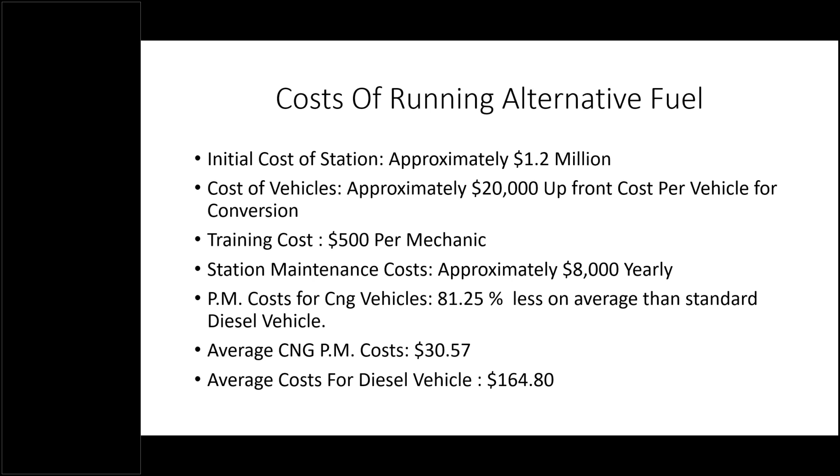The PM cost for our vehicles has dropped. It's about 81.25% less than a standard vehicle. For me to have one of my techs service one of our CNG vehicles, it's about $30—that's the oil change, the filters, going through everything, and time of labor—when it was averaging about $164.80 for me to do the same PM on one of our diesel vehicles. So the maintenance cost has come down, the fuel cost has come down. We have our own stations here at Tamarac, so the convenience is there. Our operators like the CNG vehicles—how they ride, how they drive—everything a lot better than the diesels. So it's a win-win-win-win situation.

So, at City Furniture, we're quite happy with our alternative fuel vehicles. We love the conversion over to CNG and alternative fuel so much that we've dedicated it in our 2040 carbon neutral pledge, which is one of our pledges for City Furniture Corporate, that we are determined never to go back to anything—we're never going to use or buy anything but an alternative fuel vehicle. We're reaching out into the electric field, but we know right now that's not ready for our application—it's going to be a few years before that. But we're reaching out, trying to find any new alternative fuel system vehicles that we can buy.

There's a lot of benefits to alternative fuel. We get our yearly grants through the state of Florida, and we work on that. We have a committee that makes sure we keep updated on all grants for the vehicles themselves, and all the grants for building our stations.

Right now we're building another DC in Miami Gardens, Florida. We're starting with TrueStar, and they break ground next month on that CNG station. We've opened a new DC in Ocoee, Florida. They broke ground last week on that station, and starting in July we'll be open. By January, we'll break ground for the CNG station in Tampa, or Plant City, Florida, on our new 1,300,000 square foot DC in that area.

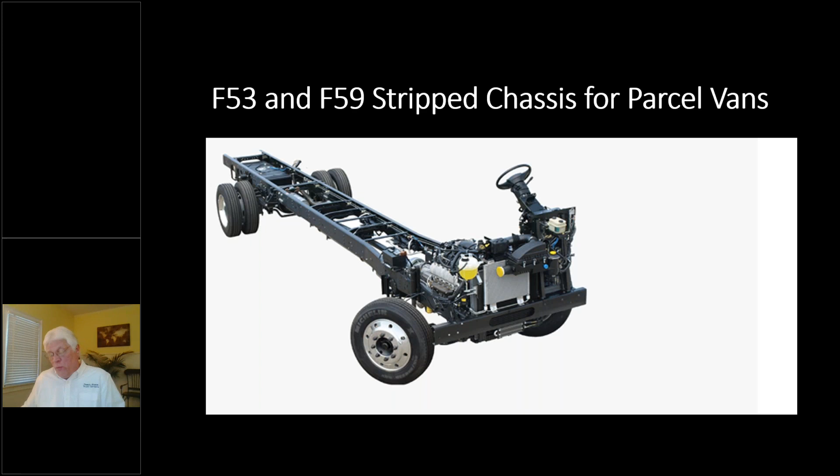Also very popular for CNG is what we call the strip chassis for parcel vans. So the vans you see in your neighborhood commonly with companies like UPS and Amazon delivering parcels, we can sell them the chassis and then upfit it with a body and they run it on CNG. It's a great application.

We're going to shift gears now and look at some of the offerings that come from Freightliner. Freightliner in the Class 7, Class 8 market is the number one supplier of trucks, about 34 to 35 percent of the market share.

The M2 112 can be a Class 7 or 8. It comes with Cummins L9N power. Cummins is one of the first builders of diesel engines, and they've been in business for probably 100 years, and they build a great natural gas engine. We offer it in the M2 112 from 250 to 320 horsepower and up to 1,000 pound-feet of torque, combined with an Allison 3000 or 4000 transmission. It is available in a wide variety of cabs: a day cab, an extended cab which can have a sleeper, and crew cab models.

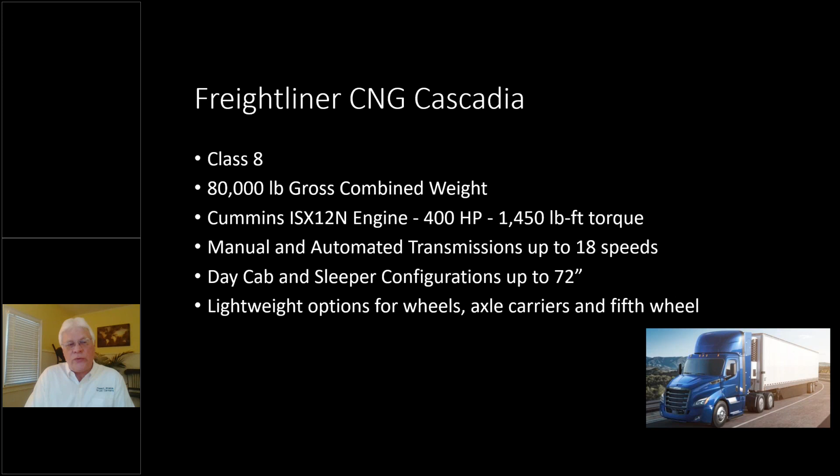Day cab and sleeper configurations up to 72-inch, that's the size of the sleeper, and lightweight options for wheels, axle carriers, and fifth wheels. Since a CNG tractor is slightly heavier than a conventional diesel tractor, we can add different options, such as the wheels, axle carriers, and fifth wheel, that bring that weight back down and keep things in parity.

CNG options are available to order today. From small delivery vans to Class 8 tractor trailers, these are proven trucks, factory built, that you can order right now. At our dealership and many dealerships throughout Georgia and Florida, there are technicians trained to work on CNG, and the parts availability is excellent. CNG is just a great fit for a wide variety of applications.

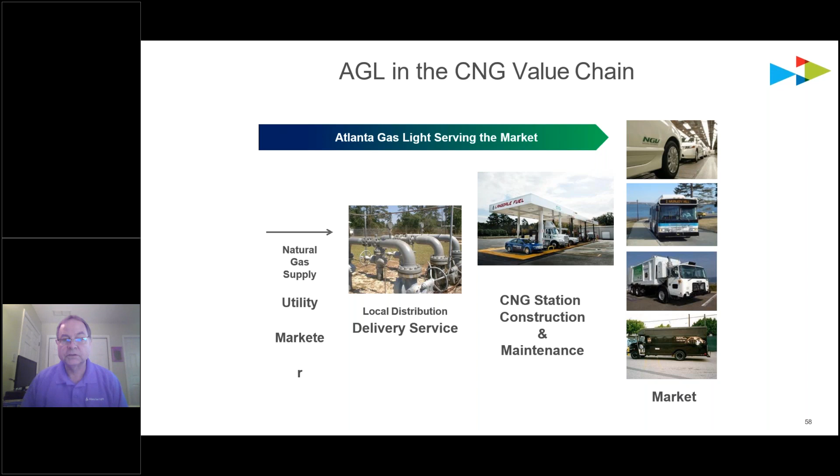We got started with this back in the 80s when we started doing conversions on our own vehicles. Then in the 90s, we created a customer-facing program where we started building CNG stations for our fleet customers. So we can provide the whole CNG value chain, soup to nuts - we can deliver the gas to the customer's premises, build and maintain the stations, and of course support their efforts in the CNG market.

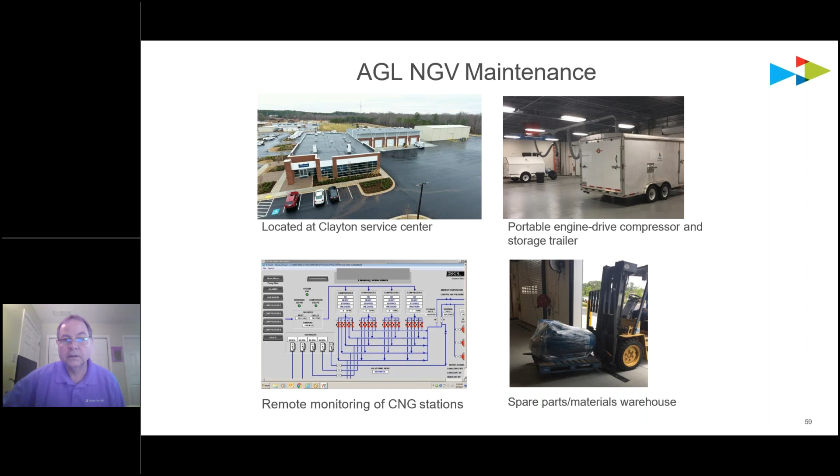So here's just an aerial drone footage of our CNG maintenance shop. We're co-located with our fleet management team in the Clayton Service Center in South Atlanta. This is where we base our portable equipment, monitor the CNG stations with our remote management application, and have a pretty well stocked warehouse of spare parts and materials to maintain CNG stations for our customers.

I'm going to talk mainly about infrastructure today, but I want to start out with a few general points regarding CNG. It's important to note that CNG can work very well in a lot of applications, but it's important to focus on locations and vehicles that use a lot of fuel and return to a central location, primarily because you've got some upfront costs in terms of the fueling infrastructure that you need to cover, and the higher the throughput through that station, the quicker the payback, as well as the return on the incremental cost of the vehicles. So city vehicles, service vehicles, meter reading vehicles are ideal candidates.

We have some 300 CNG vehicles in our own fleet. And then, of course, the other applications, transit, trucking, waste, are also ideal candidates because they tend to be centrally fueled and fixed route type of vehicles. If you have a well-developed public CNG fueling infrastructure, then you can branch out in other types of fleets that may not be so fixed route based. But if you don't have public infrastructure in the area, then it's key to be able to fuel your own vehicles at a central location.

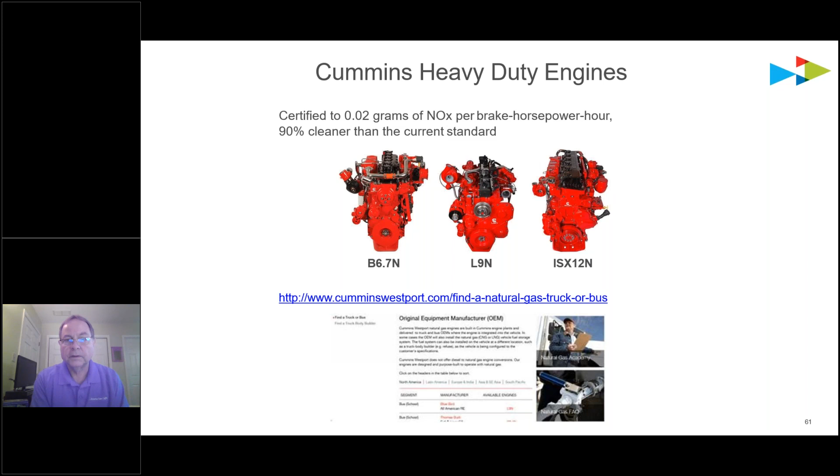As Dave mentioned, that's the engine that powers the Class 8 tractors that can haul the 80,000-pound GVW.

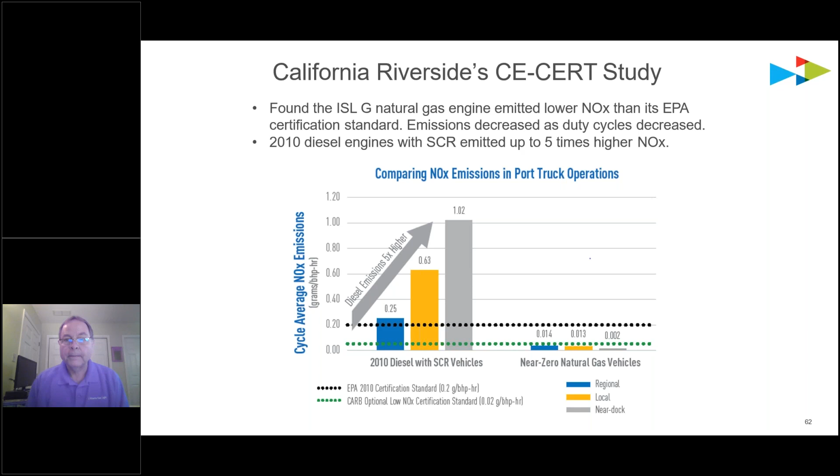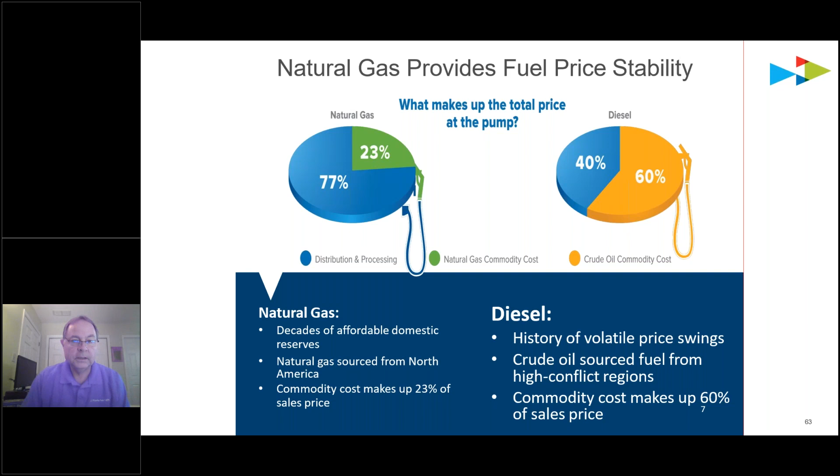Whereas with natural gas, if the underlying commodity cost increases, it's not as apparent at the pump, because so much of the total cost of CNG is really the fixed costs of infrastructure and maintenance. This is an important point. A lot of large fleets considering alternative fuels really like this, because there's a lot of uncertainty around fuel costs, and anything they can do to eliminate some of that is a big deal for them.

We talked a little earlier about renewable natural gas. Companies like Waste Management and others are deploying RNG as a substitute for pipeline natural gas, and are able to show an increase in the reduction of their well-to-wheels greenhouse gas emissions. With typical landfill gas, it's up in the 80% reduction compared to diesel, and it can go carbon negative with certain types of agricultural waste, RNG from ag waste digesters. Last year, the amount of RNG used in natural gas vehicles in this country increased to 53% of the total amount used. So there's a lot of it, and a lot more coming online.

If you want to learn more about RNG, go to the Clean Cities Georgia events page. We did an RNG seminar back in May, and there's a recording and I believe a PowerPoint presentation there with a lot of great information on RNG. I encourage you to check that out.

Atlanta Gas Light has been providing for RNG for our customers for many years. About 10 years ago, we filed the TS1 rate that allows us to take what we call high BTU gas, or pipeline quality gas, into our system from projects like landfill gas RNG plants. To enable delivery of that gas to market, we also have a separate TS2 rate where we're able to transport gas that's cleaned up enough to inject into a dedicated pipeline, delivered from point A to point B, but not necessarily clean enough to inject into our system. So there's no interconnection - it's just a dedicated standalone pipeline that we can also provide as a separate service.

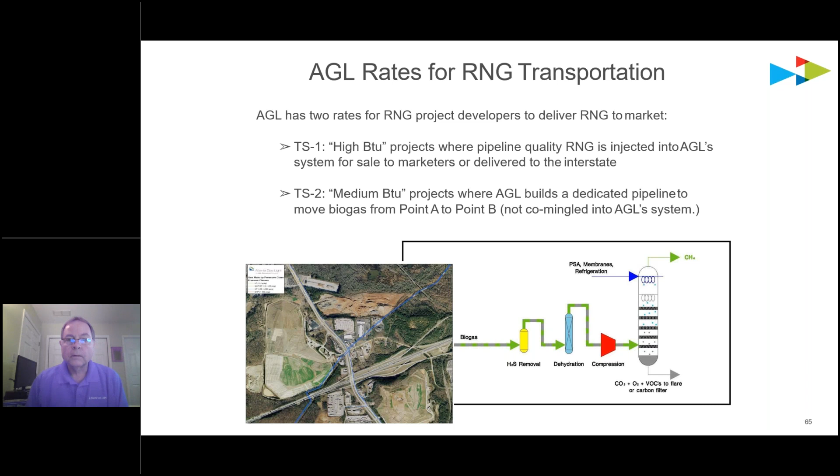So getting to the CNG fueling infrastructure discussion, there are a lot of different angles, considerations, and options for providing CNG fueling. One of the first and most important decisions is whether you can do time fill, or if you need to do fast fill, or some combination of both. Time fill is where you have the vehicles parked overnight anyway, and it's a more cost-effective, efficient way to fuel them over time, say 10 to 12 hours overnight.

Note that both City Furniture and Waste Management are using this approach. There's a lot of advantages. For one thing, you can typically downsize the amount of CNG compression you need, because you're filling over an extended period of time. It also reduces the maintenance on the compressors, since they're not starting and stopping as much, which puts wear and tear on the components.

You also have the opportunity to potentially use off-peak electricity. Some utilities offer lower cost electricity if you wait until after 7 or 9 p.m. to start up your compressors. And last but not least, you tend to get a fuller fill because you don't have as much heat of compression when fueling a CNG vehicle. So you can get more like 90% of total tank capacity versus, say, about 80%. You get more range out of the same tank doing time fill compared to fast fill.

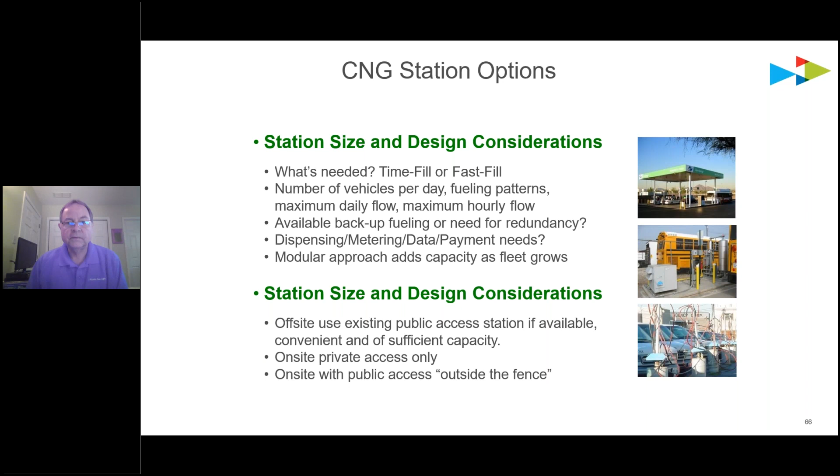As far as the location of the station goes, you could co-locate with another fleet somewhere, work with a local truck stop or gas station to add CNG at their site. Maybe you want a private station for your own use behind the fence, but make it available to others in the area as a service, or to help drive throughput and share some of that fixed cost over a larger volume. In that case, you could have a dispenser outside the fence and sell fuel to other fleets in the area.

Actually, that's another advantage of time fill. You don't have as much time where your drivers are queuing up trying to fuel somewhere. There's some labor savings there that can actually be very material.

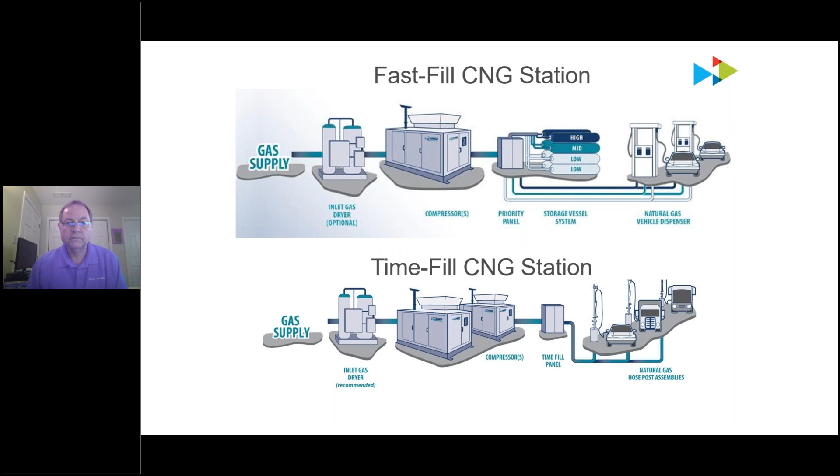Our service offering for our customers at Atlanta Gas Light for CNG is primarily our V52 rate. We have a rate where we can build, own, and maintain the CNG station for customers. We'll work with the customer to design the type of station that meets their needs. The customer typically provides the land and does any site development, but we'll come in and install the infrastructure, and we'll be the partner behind the scenes to build, own, and maintain the fueling infrastructure. We're not actually making the CNG and selling the CNG; we're enabling the customer to make their own CNG with the equipment we provide.

So they would post any retail sales price that they want to. If they're going to be selling to others, they would pay the electric bill and the gas bill separately. But we would recover our costs for the infrastructure and comprehensive maintenance, 24-hour service and repairs on the infrastructure through a simple 1.5% per month monthly facilities charge.

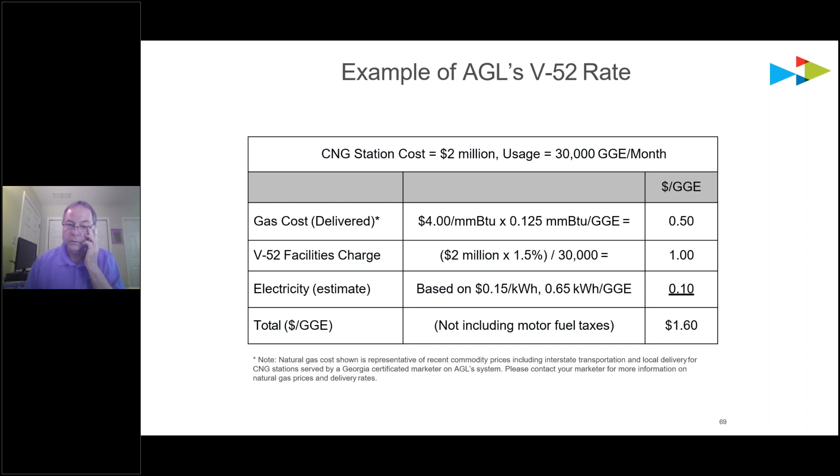This is an example of how that rate would be applied, a very simplistic example, assuming a nice round number of a $2 million station, 30,000 gasoline gallon equivalents per month. Based on recent gas prices delivered into the meter, you're running about 50 cents per gallon. As you can see on the second line, the V52 facilities charge, with the 30,000 GGEs per month example, works out to about $1 per GGE. However, for that same station, you could put maybe 60,000 GGEs through it, in which case this line item would only be 50 cents per GGE, so maybe as low as $1.10 per gallon. This illustrates the point I was making earlier that the throughput on the infrastructure is an important consideration. This example also does not include the 50 cent per gallon alternative fuels tax credit that Rodney mentioned that could also come into play.

Here's an example of one of the stations we built for one of our customers, DeKalb County, another Clean Cities Georgia board member, which has on the order of 300 CNG vehicles now, and this is a really successful project. This particular station we built for them in Decatur at their central transfer facility is one of the public stations in the Atlanta area.

A second example is the station we built for City of Augusta, the second one they developed. We built this one for them under a turnkey construction project, and we do the maintenance for them. It's a public station right off of I-20 and Bobby Jones Expressway.

So if you want to know where the public CNG stations are, the Department of Energy's Alternative Fuels Data Center includes a station locator for alternative fuel stations. You can go to this link and click on locate stations, put in CNG and your zip code, and it will show you where all the public stations are.

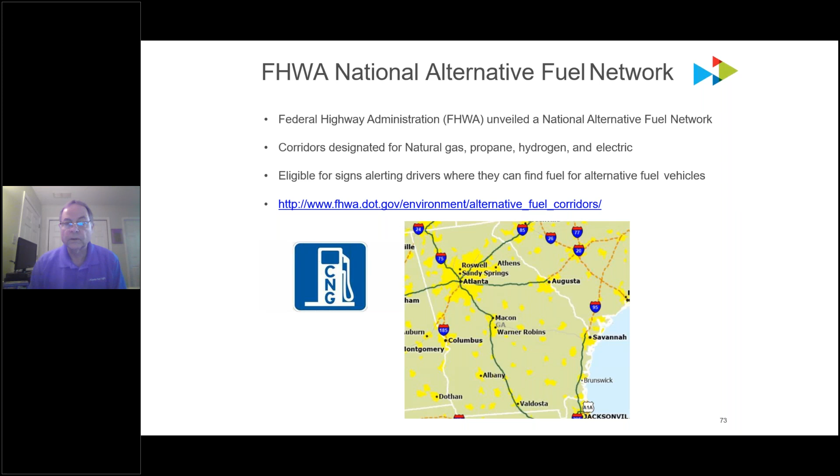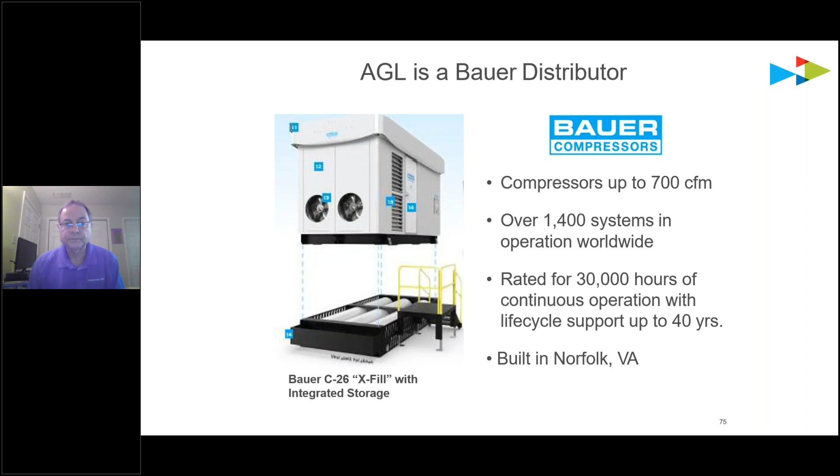On the even smaller end of the range, there's a company named Fuelmaker that makes CNG fueling appliances. These are small time fill units that you could install for $5,000 or $6,000. So if you're on a limited budget and you've got a location where you've only got a handful of vehicles, but you want to deploy CNG, this provides some options.

There's also a company named Ingevity who has manufactured or developed a low pressure adsorption CNG storage system for light to medium duty vehicles. Ingevity is also one of our board members here at Clean Cities, Georgia. So I want to mention their work and the fact that they have worked with Fuelmaker to develop a modified version of this FMQ time fill unit.

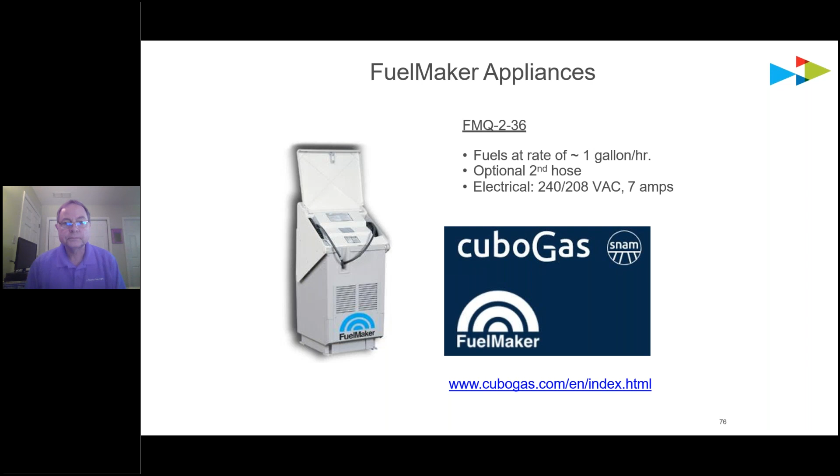It's set up for fueling the vehicles to the 900 PSI that they're running in their activated carbon storage system. This system actually enables you to store essentially the same amount of fuel in the same size tank, but at 900 PSI instead of 3,600 PSI, which provides a lot of benefits in terms of reducing costs for fueling of the vehicles. The FMQ2 900 PSI version is available through Ingevity, so I wanted to mention that as well.